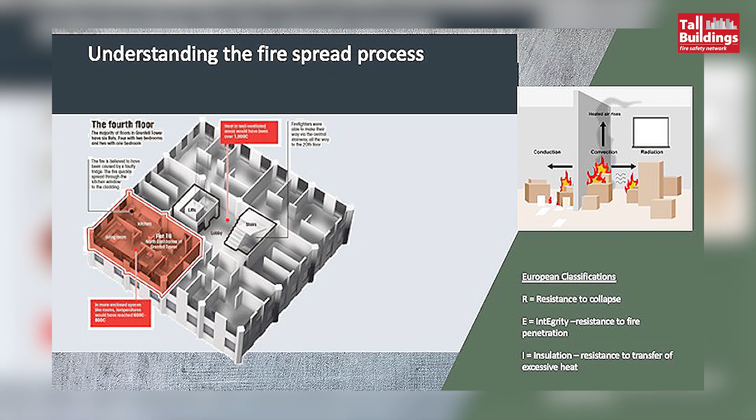So we're trying to think about that in relation to the SAFE process, and certainly a drill that I went to with Andrew in Brighton showed the complexity of getting the firefighters up a staircase, together with all the equipment they have to deploy before it's charged up with water, and then when it is charged up with water, how much that dynamic bit of hose is a major problem with evacuation. Imagine trying to escape down that with your children or your elderly relative.

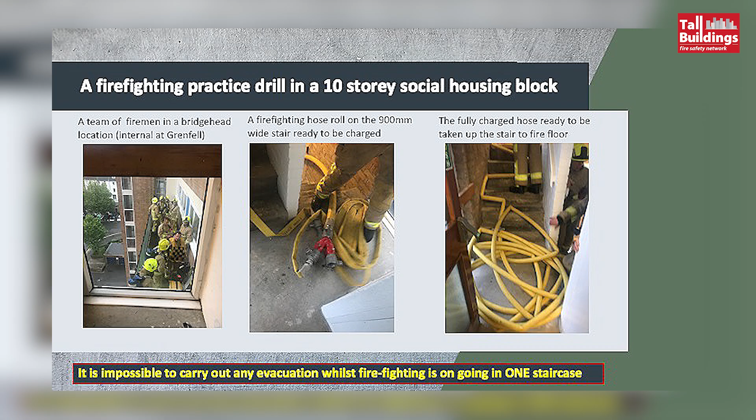And certainly we went on the Hereford House MHCLG trial. I don't know if anyone saw that, but getting an evac chair down a staircase with all that going on is not possible. So these are very much the considerations we had about the second staircase. It's effectively impossible to carry out an evacuation whilst firefighting is going on. That was what became very clear.

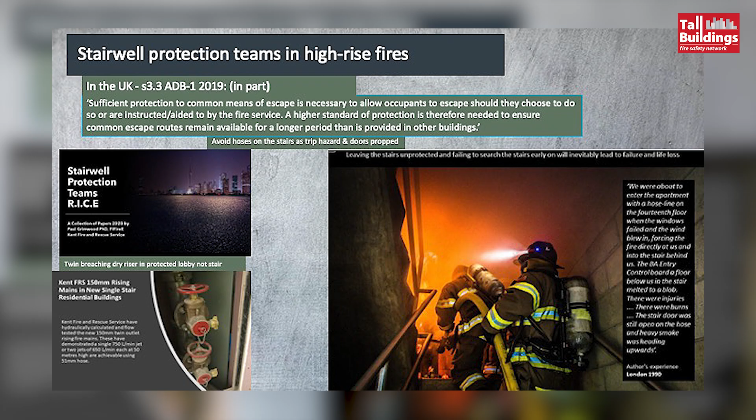And this was also clarified by Paul Grimwood with his RICE principles. Remind me when I get this wrong, Andrew, but it's rescue, intervention, containment and evacuation. Is that right, I think? And that acronym helps the fire brigade with their decision-making. And it occurred to me that this SAFE acronym actually makes sense for what we need to think about

as a design process. And looking at the firefighters going up that staircase here, and on the left-hand side also the twin breaching dry riser, which makes a lot of sense, I think, rather than the single breaching dry riser, for those who are familiar with that.

So moving swiftly on, you saw a bit of this earlier, but the painting has come from the photograph, and it's showing how firefighters in certain parts of the country work from a bridgehead 2 to 3 floors below the fire floor. And then they're taking these hoses up a staircase, which people above have got to evacuate down past.

And not only are there the hoses on the stair, there's also, as we've seen earlier today, potentially a lot of smoke, because those hoses coming in through the door into what is effectively a corridor with flats off it are propping the door open, and smoke's now going up the staircase, preventing people from going.

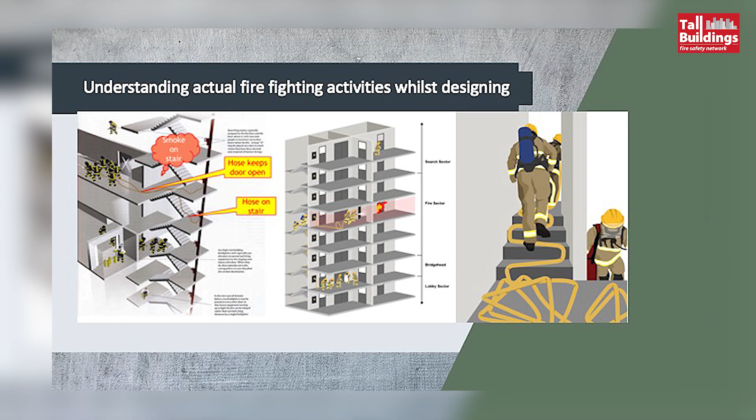And so there's a conflict here in the design: where should that dry riser be? Should it be on that staircase? We all see them there, because in a way that suits the firefighting process, but it contradicts the means of escape. And I think some fire authorities, tell me if I'm wrong, work from the fire floor rather than the bridgehead below. So there are various approaches across the country.

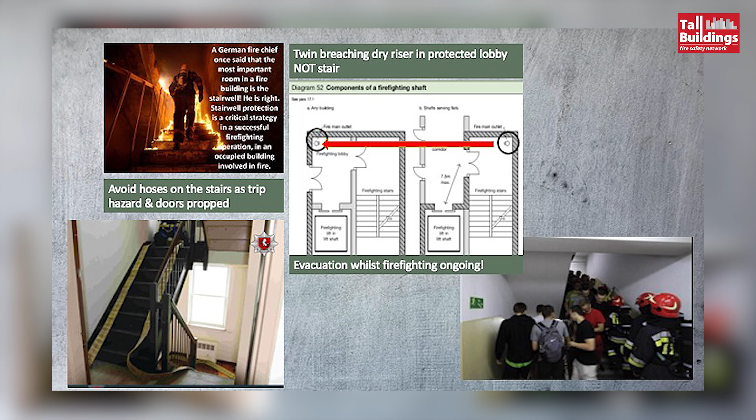And some of this also comes from looking at the legislation. This diagram here, diagram 52, I think it's from the ADB, is it not, Andrew? It's showing a dry riser for shafts serving flats on the right-hand side in the staircase, but there's no lobby. On the other one, it says any building, which I assume includes residential as well. If it's got a lobby, it's best in the lobby. So, you know, we had that sort of discussion in the background at last year's conference.

And what is the benefit? I noticed in 9991, for care homes, it's suggested being in the lobby, but for other flats, it's in the staircase. So we've got, as we heard from the BS talk this morning, there's discrepancies in regulation or recommendations and guidance, as we all know. So trying to avoid, certainly, these hoses on the stair, I think, is a fundamental issue.

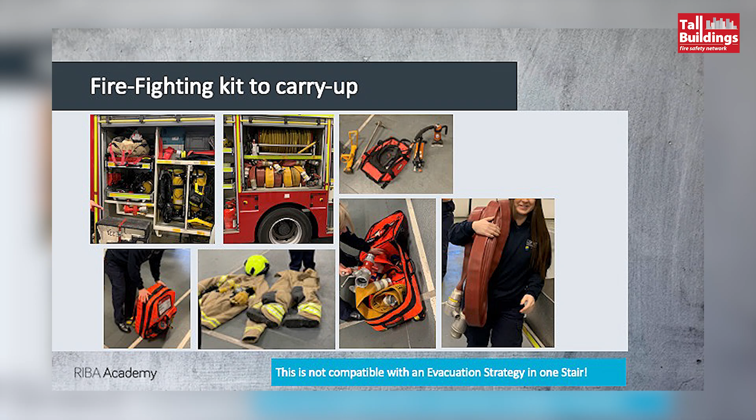And this is all the sort of kit, and I'm sure the firefighters know that they're carrying all this up, and there's female firefighters also carrying this stuff up, and then they're deploying it. There's these pressure PPVs, and they're often carried by the individual teams on their engines, but certainly helping assist air movement by that version. It won't pressurise the whole staircase, but it will help smoke movement. And that is something we don't actually see on the drawings. You do not see which way the smoke's going or which way the air's going.

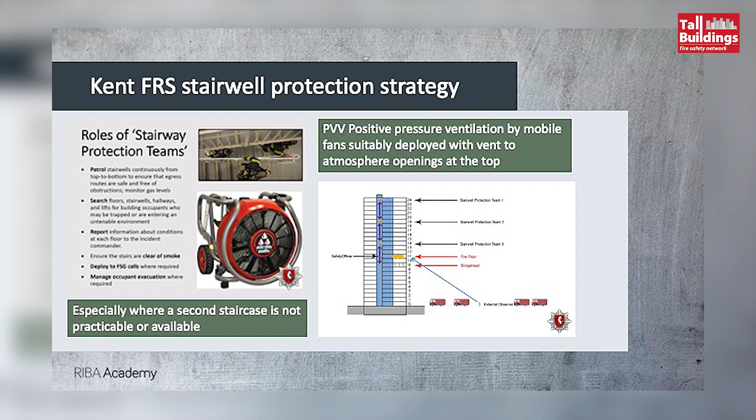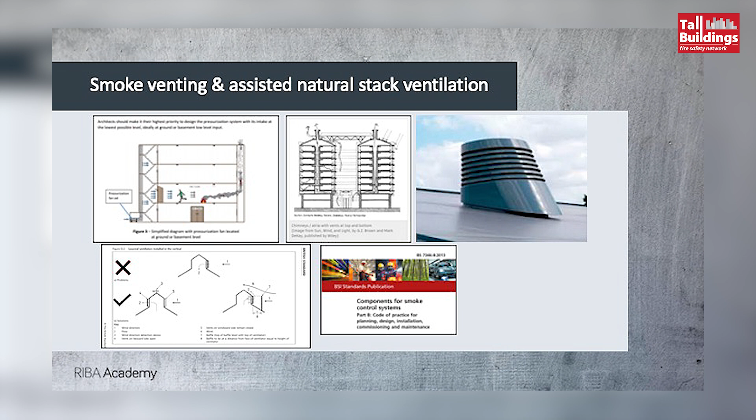So we've got to start thinking about it in drawn terms, and this little section diagram top left is showing someone running away towards the staircase, but the smoke's going away from them towards the smoke shaft. And there's a positive pressurisation in the staircase helping that to work. Not full pressurisation, but possibly a positive pressurisation fan. But that seems to make sense, that you're actually moving away from the way the smoke could go.

And anyone who knows Grenfell knows that the vents were near the staircase, so the smoke was coming towards the staircase the way you're supposed to go. And listening to Jim Glockling this morning, the toxicity of that smoke is a major issue. So how far can you travel in that circumstance? There's various other issues about stack effects and roof vents. I won't go into those.

But we all know that, frankly, every tower block or every home for multiple occupancy is essentially a care home without the 24-hour supervision. You've got elderly people here who are released from hospital early, or they've had an operation. They're not very mobile. How are they going to evacuate given these other conditions, as well as young children or anyone who's had a recent accident in their sports field? So looking at architects historically, we've drawn a refuge 1400 by 900 on the landing. I don't know I'd like to sit in that, to be perfectly honest, given a firefighting operation going on, and having a better refuge has got to be the process.

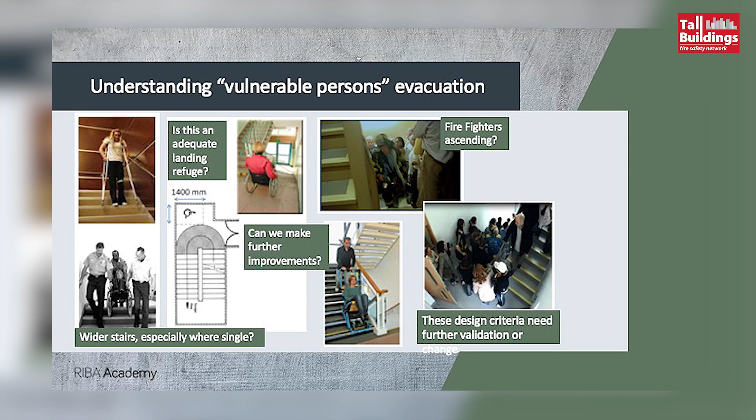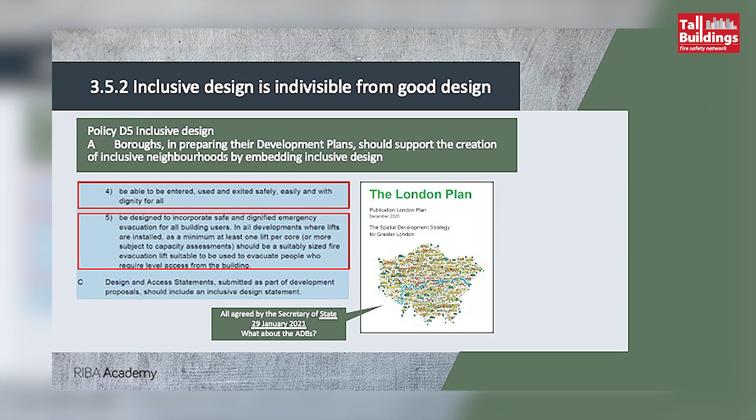And we've certainly had a lot of discussion about fire stopping as being a major problem in the industry, from the point of view that compartmentation ideally is sorted out by a plan or a diagram showing the performance requirements of the passive fire resistance. But the fire stopping issue is a much bigger project and needs to have information probably provided a lot further down the line in terms of the process by which buildings are designed.

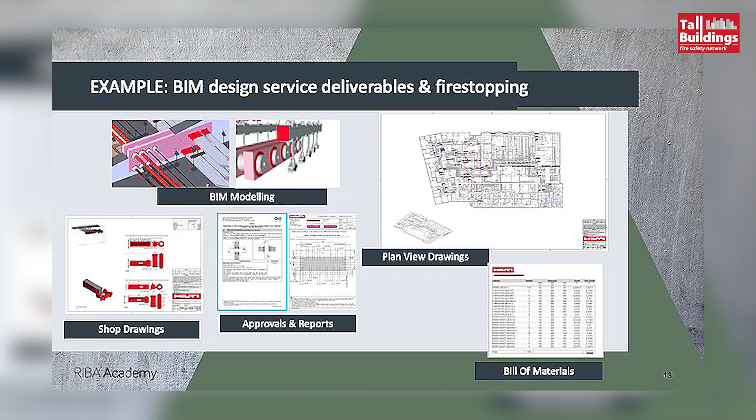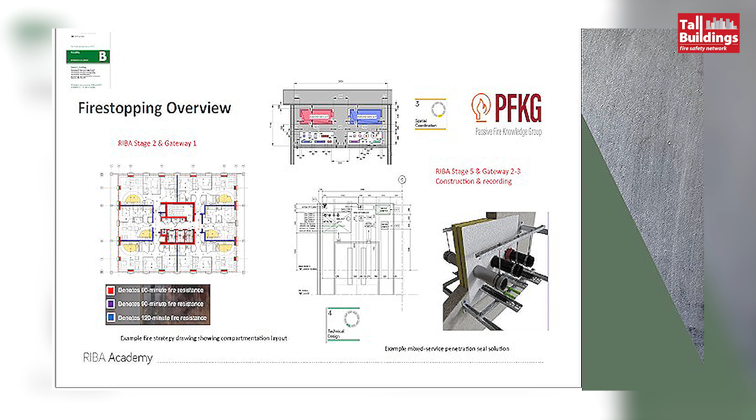It could actually affect the floor-to-floor ceiling heights to get all these services together with their separation zones in a corridor, for example. So it has a major effect even back on the planning stage of a building. So this is how the design team have to consider planning, strategic fire design, as I call it, and then detailed fire design. And that comes into a problem with the gateway system, which I might touch on.

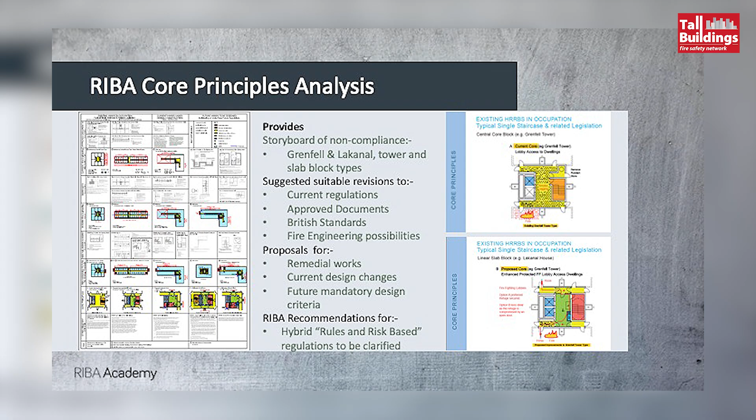So we're trying to balance all these issues with remedial works, particularly in existing buildings. This is the sort of diagram we've tried to come up with, showing how we could remediate an existing building - there's an option A or an option B, staircases and additional corridors, whatever. But that's going to be a big upheaval to any existing building.

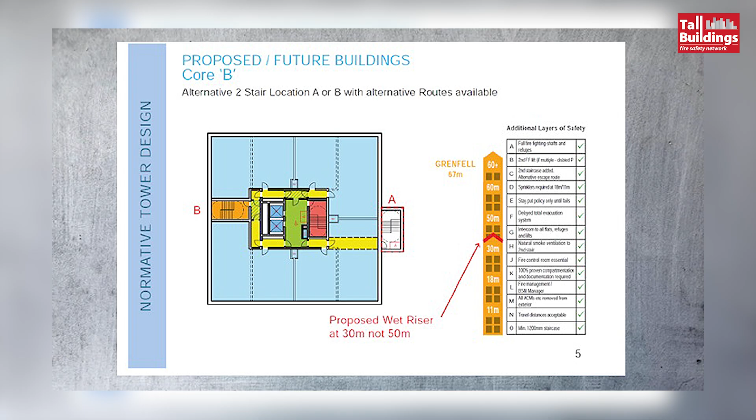Certainly we were looking at retrofitting sprinklers as a major upheaval to an occupied building. So we're looking at the smoke control issues, which were more in the public areas, the common parts, and I would suggest easier to update.

But we know from Grenfell, we had lots of challenges with smoke systems - smoke control systems designed poorly, didn't work when it came to it, or were mechanically broken down when they're required. So they all have these issues with an active fire system. Although I know BS 9991 assumes it'll all work, I don't think the world is quite like that - but I'm not an engineer, and an architect would say that, wouldn't they? I think things do break down, particularly in social housing, whereby there's not a big budget.

So stay put with single stairs, or total evacuation with two stairs and smoke control, is very much what we're trying to look at.

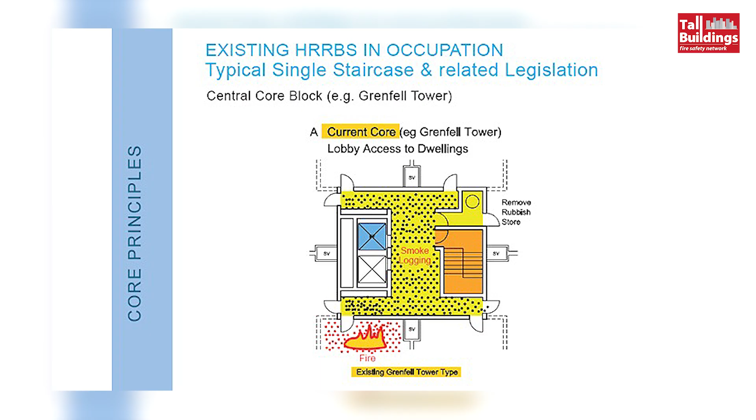Even putting in refuges and evacuation lifts might help, but it's still a major problem with a single staircase building. You might have another option of going up to the roof, which some people did try at Grenfell, but it didn't work because it was locked or whatever - and would that be suitable?

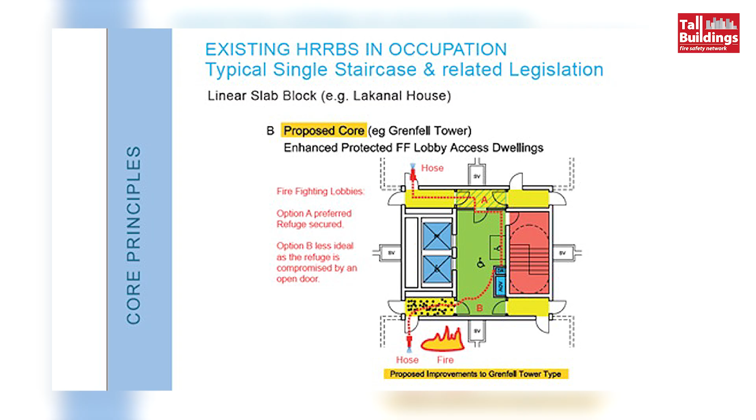So looking at enhanced single staircase, or actually adding the second staircase, you still get this congestion and the same issues unless we can get the fire brigade to change their approaches on the staircase.

But we've actually got options to go horizontally, as you would in a hospital, to transfer - progressive horizontal evacuation, I think is the term - where you would go through this red line into another zone and then can escape down the other staircase. I think even if the staircases are together, you can still have that propensity.

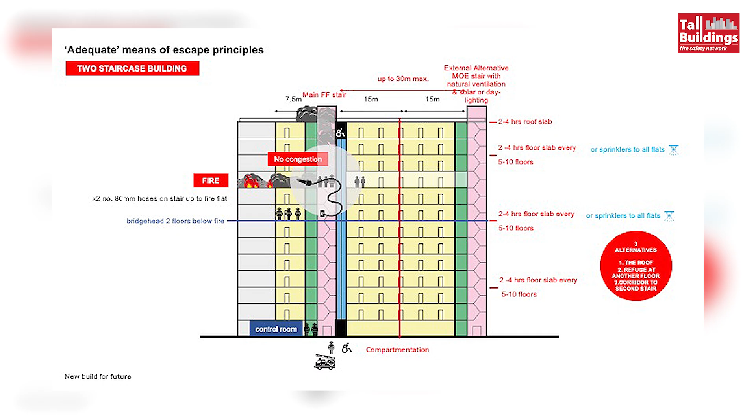There's sort of additional layers we can add - compartmentation, even fire floors being increased, etc. Other layers we can add. If you can get sprinklers in there, all the better. Certainly in a new build it makes more sense, but retrofitting is more of a problem. So we've got more alternatives to evacuate - that's crucial here.

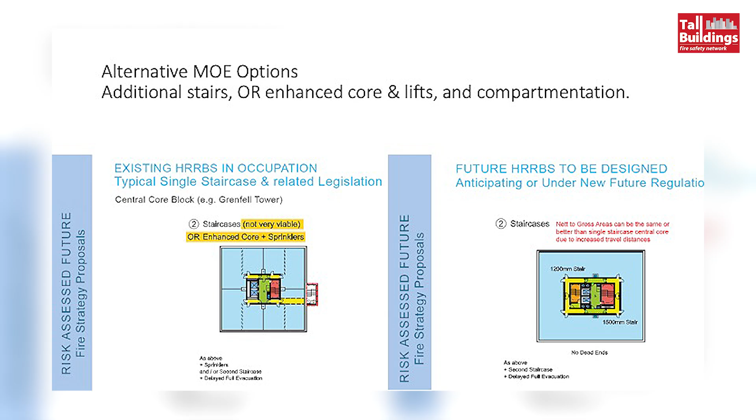These were just some of the diagrams that we've tried to put together to understand that process. It might well be, on the right-hand side longer term, if we've got to have - as has been very much used - internal staircases, which, as Andrew was saying earlier, back in the day were on external walls because they could be naturally ventilated. Certainly there might be a way to reintroduce that as well in new builds, but there's issues about net lettable areas and all these other issues.

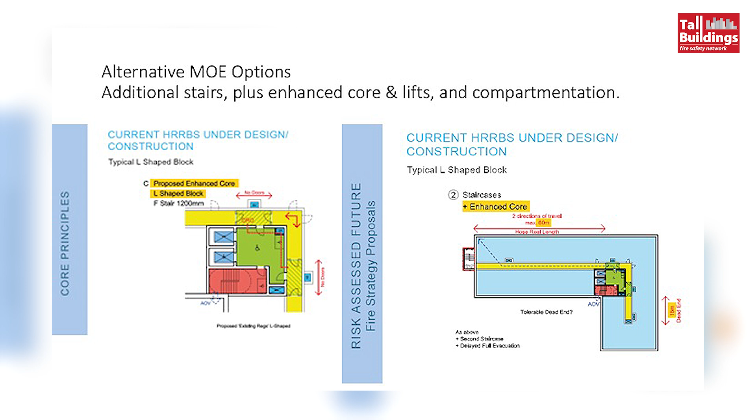So I think it comes to the end of my bit here. Just one thing has occurred to us under the new BS 9991 - these travel distances are being massively increased, and Andrew will explain that a bit later. But by putting two staircases in, they seem to have been compensated by 135 metres, did we decide, Andrew?

Long corridors with 90 metres between stairs. So, but then extended single direction travel distance either end of the stairs - was that the intention of the updated BS, which we hear is going to be revised anyway?